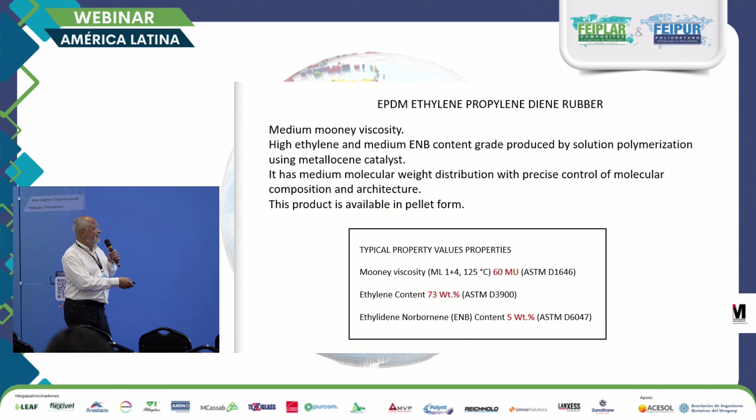First, I'm going to talk about what is a TPV. It's a thermoplastic vulcanizate in which we have a polymer matrix of PP, a PP matrix and crossed links of EPDM. So we have a rubber with a plastic. That's why the name is elastomeric thermoplastic.

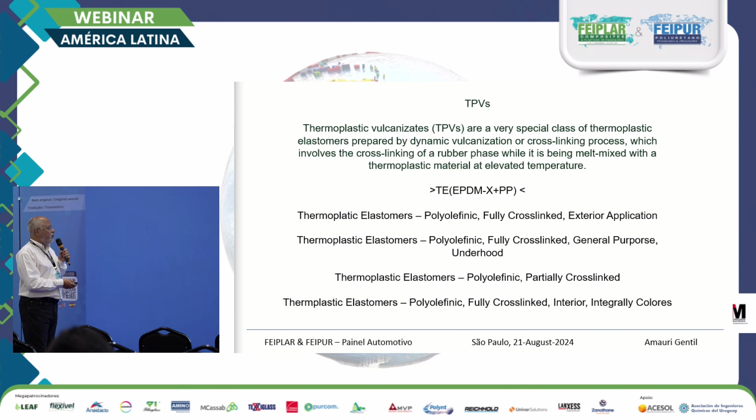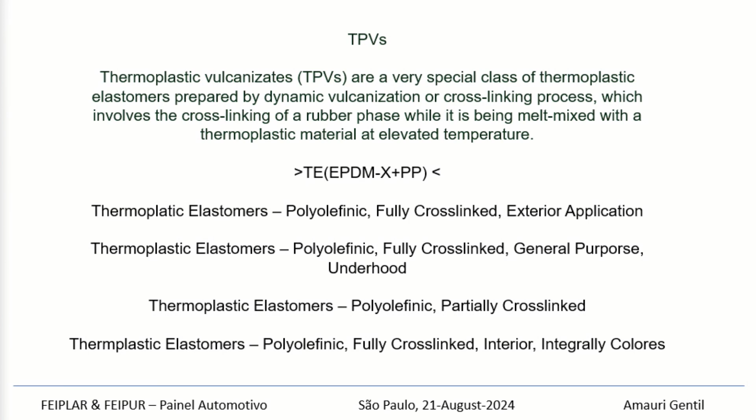I'm going to talk about a case that happens in the automotive industry. We call it glass run channel. It's this piece. If you don't know this part, it's where the glass runs in the doors. The glass of the windows runs inside this channel.

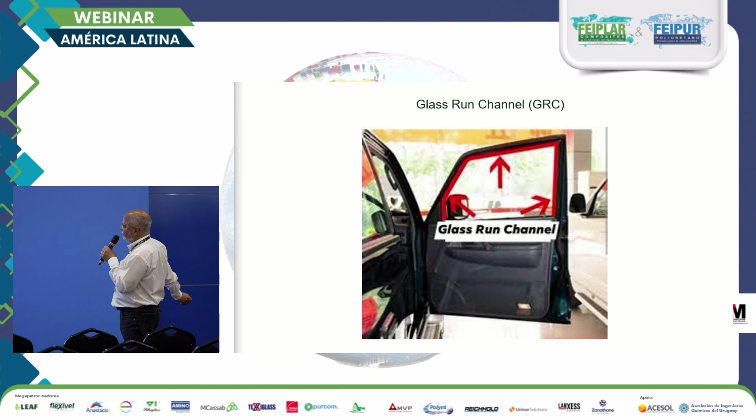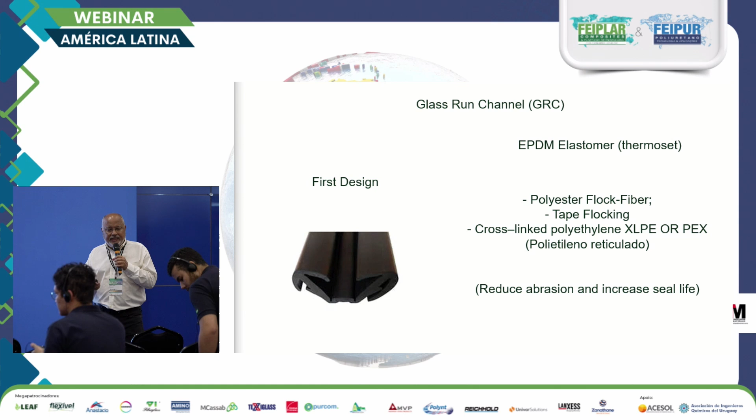How was it done in the past? This part in the past was made of rubber. Rubber is an EPDM. And where the glass ran, we needed a different type of material, of polyester, of flock fiber, because the characteristics of rubber is to grip. And if you place glass in a channel like this, it's not going to glide or slide.

That's why we did the EPDM rubber, and we applied a polyester flock fiber, or a tape flocking, or a cross-linked PE that had the reticulation process to run the glass.

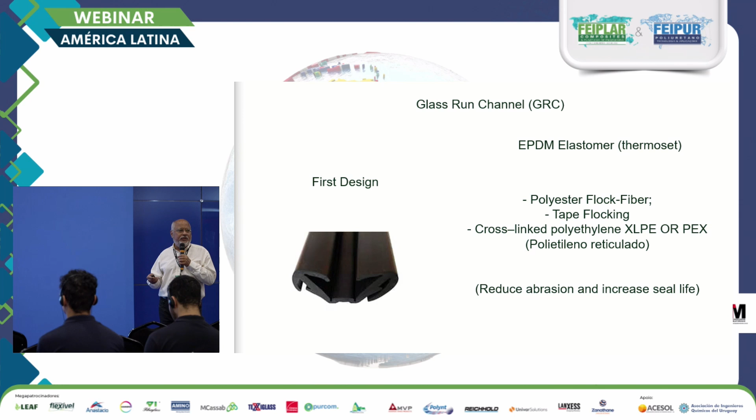This was all replaced by TPV. Why? One of the major reasons, which is a trend of all the thermoset materials, is to change to thermoplastic material, especially for recycling. And by recycling, I always like to stress that it's not at the end of the product's life. I talk about recycling during the production process.

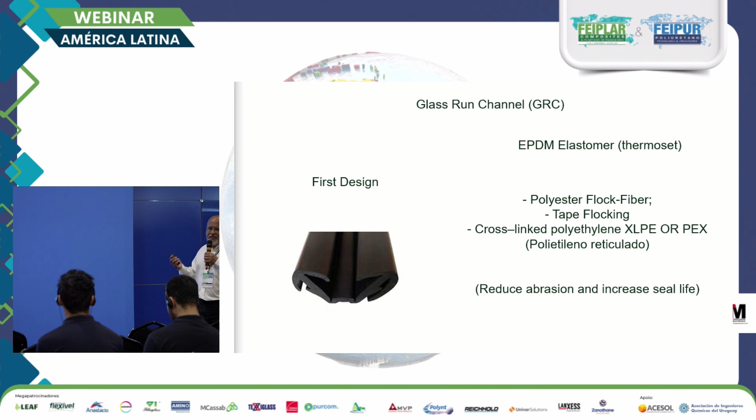So when we're producing a thermoset material, like an EPDM rubber, all the scrap wasn't reprocessed because it's thermoset. After it's vulcanized, you can't put it back in the extruder. With thermoplastic material, when I mention recycling and regrinding, I'm always talking about the process. Because after this goes to the landfill, after 30, 40 years, it's going to mix with PP, PET. It's not going to become a glass run channel anymore.

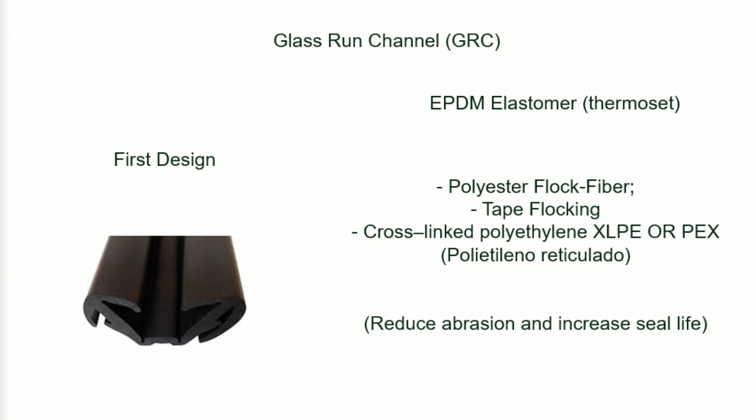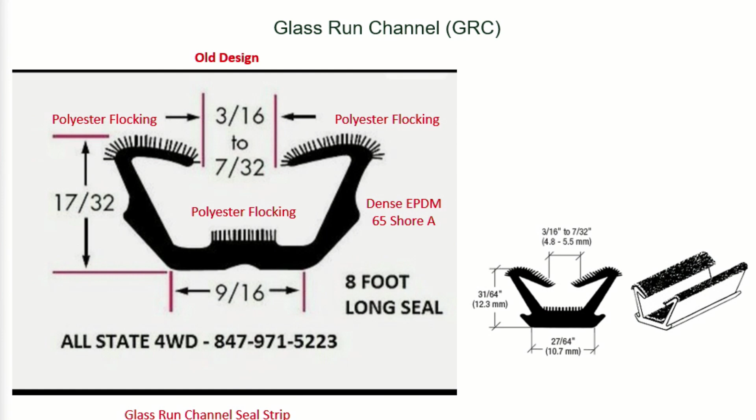During the production process, all the waste, the scrap, will be ground again and put back in the production process. How was this part in the past? These little wires here are the polyester flock fibers. It goes inside the metallic channel, and that's where the glass runs. So the entire surface that is in contact with the glass needs this flock fiber on the EPDM rubber.

And what did we do in the automotive industry? We changed our process. What was the main evolution? We used a TPV in which you have 3 grades of material. So you're going to work with 3 extruders and 1 single matrix. And why do we have to work with 3 extruders? Because we're going to have 3 different types of material.

The material is expanded TPV, like foamed TPV, in which you have a reduction of mass. The other part of the same part is a dense, rigid TPV. And where the glass will run, we're not going to use polyester flock fiber anymore. We're going to use a low friction TPV.

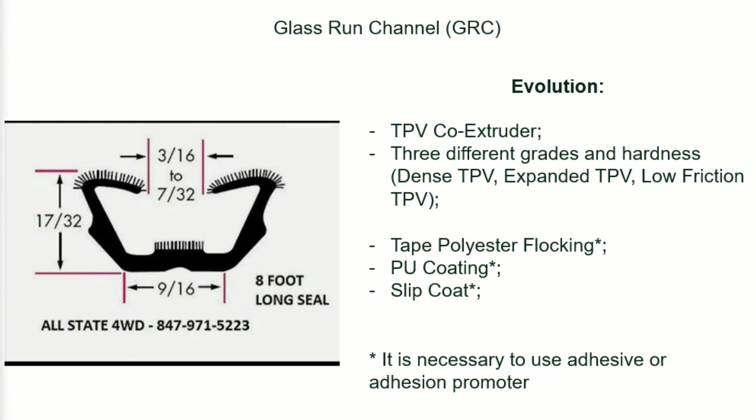And when we do all that, we will have 3 hardnesses, 3 different materials running in that channel, and the adherence between them will be the melting point of the materials. So it will heat and adhere to each other, and we will have a very strong anchorage. So you don't need adhesive or anything, so you save a lot in the production process.

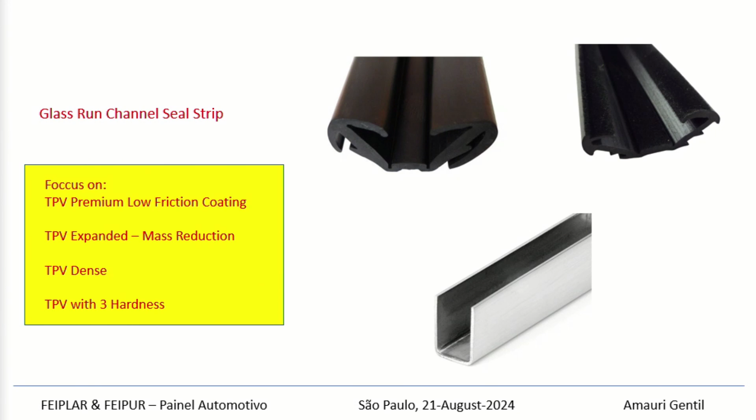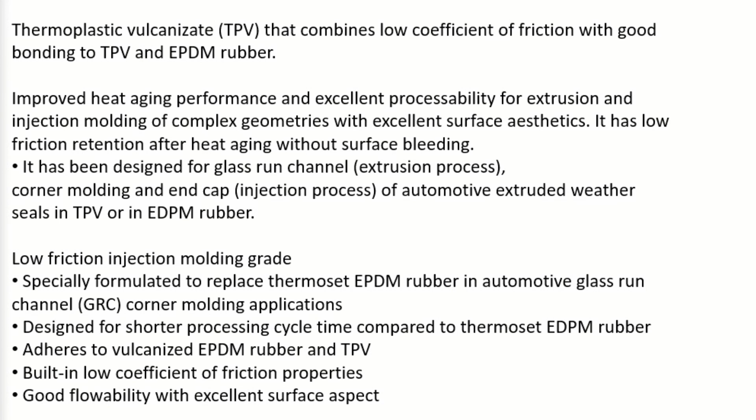I'm going to speak of some of the advantages of having a low friction TPV. It will offer excellent performance with very little waste. You will be able to do a better design that will fit the vehicle's door better. You won't have any gaps or deformed parts. Also, you will have much better durability than a thermoset rubber.

Additionally, in terms of sustainability, what are the advantages of using a TPV? TPV's density is lower than a thermoset part, so you will be able to reduce mass. Automotive companies want the car to weigh less and less, to reduce mass and consume less fuel. With the density of a TPV of 1 gram per cubic centimeter, or an EPDM of 1.15, it means 15% more mass on these parts. And they have a considerable volume in a car.

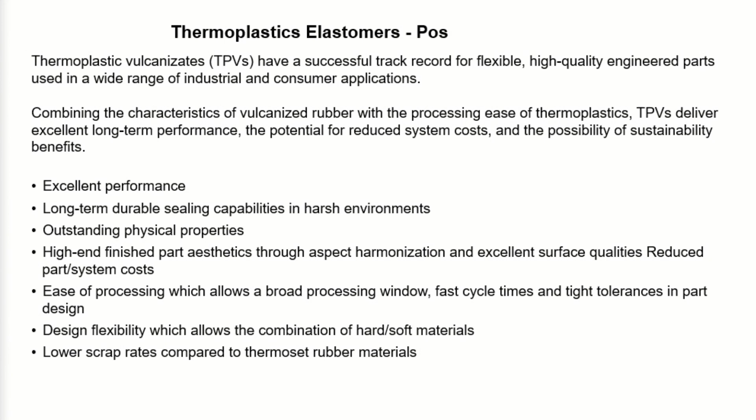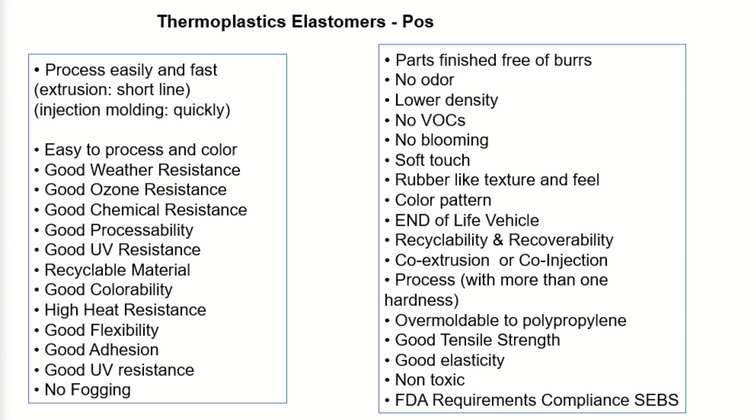Resistant to weather. We have instruments that simulate UV light, and the part holds its color. It doesn't fade or lose its color. It also has good chemical resistance, good processability, and good UV resistance.

The material is excellent for adherence. Also, in all the tests we conduct in vehicles, the part can't exude oil. Inside a vehicle, when the external temperature is 40 degrees for about 2 hours, some areas inside reach 105 degrees Celsius, and at those temperatures materials start releasing oil.

Things like carpets and plastics release oils that condense on the glass. That's what we call fogging, and it fogs the windows and glass, causing distortion of the image. There's also odor - if you get a mat like the one you put over the rug, the smell inside the car is terrible. TPV doesn't have any odor.

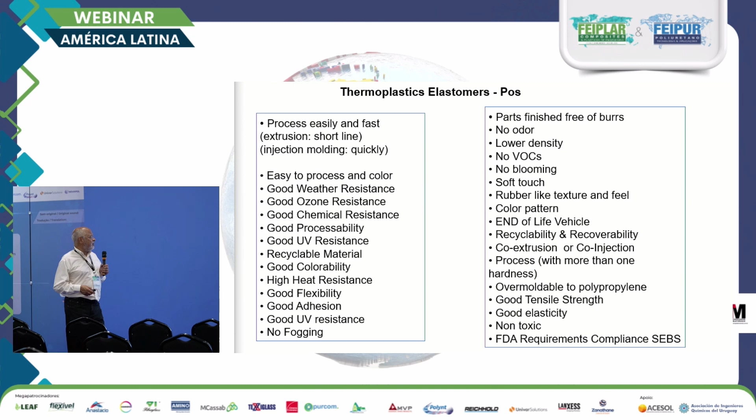We were able to achieve hardness from 20 Shore A to 40 Shore D, so it's a wide range for polymers. The temperature range goes from minus 40 to 130 degrees Celsius, so you can work inside the engine compartment, for example.

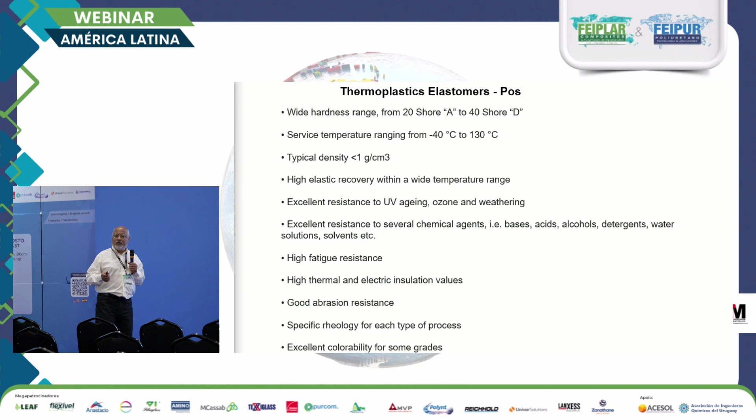Where the air filter and the hose are, you can use TPV material there. So temperature up to 130 degrees is our normal working range. It has excellent UV resistance, resistance to ozone, detergents, acids, fatigue, and good abrasion resistance, as well as good color standards.

There are some things against it. It's not a perfect material for everything. What is the greatest problem of TPV? Since it has plastic in the middle, it has the characteristics of plastic.

The compression set and permanent deformation are much worse than rubber. In some parts of the door, we have a sponge bulb with a metallic core, and we use EPDM there. We don't use thermoplastic, so for some applications it's not going to work.

Another application where it doesn't work - I won't make parts out of TPV because the deformation doesn't meet the requirements. When you apply a load, it will deform.

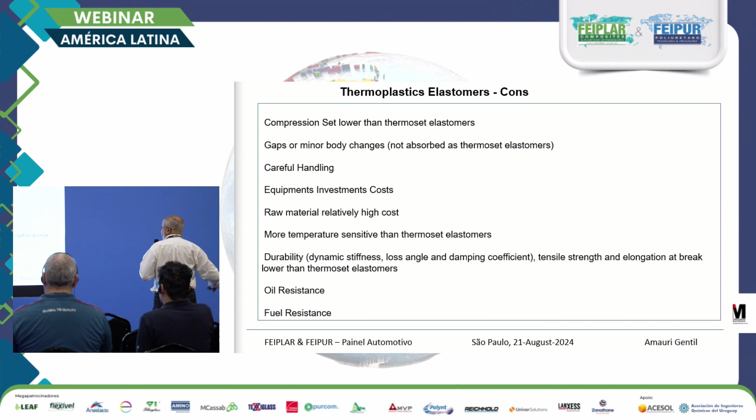You have to be careful when you handle it. It requires careful handling because it deforms if it hits any sharp edges during transport. So when you wrap it, it has to be wrapped in paperboard so it doesn't deform.

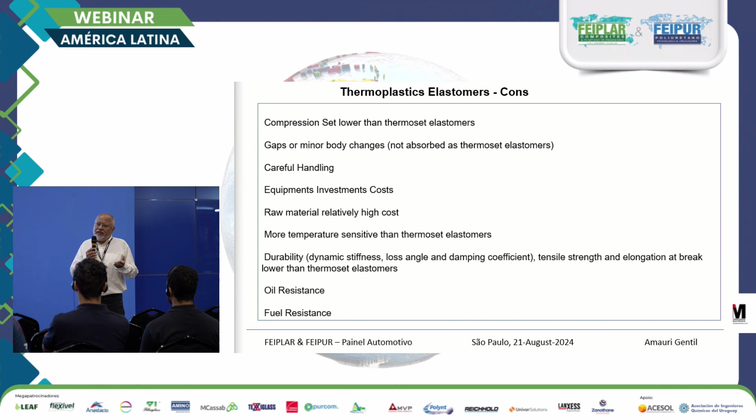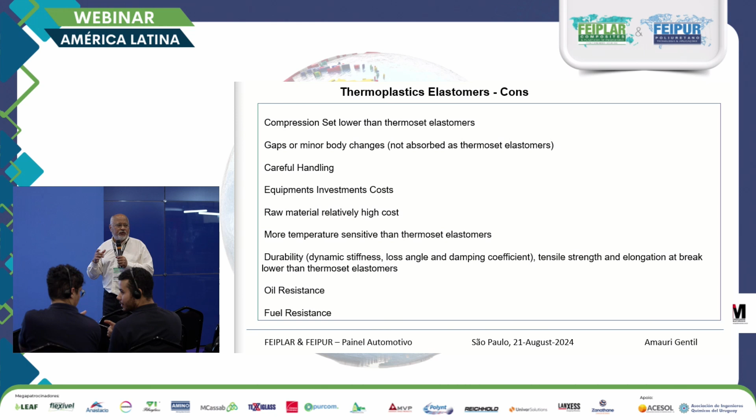So TPV is ideal for things like air vent tubes, glass, and body seals - it's excellent for that, and also for some boots from the half-shaft.

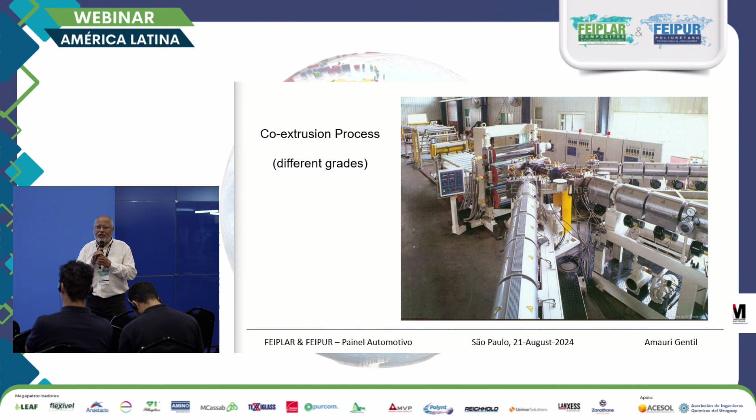This is what I was saying - when we work with the glass run channel, where we have glass materials and expanded TPV, dense TPV, or low friction TPV, we have two entries that go to one single matrix. It has adhesion to the material, and when it cools down, it's already anchored without the use of any adhesive.

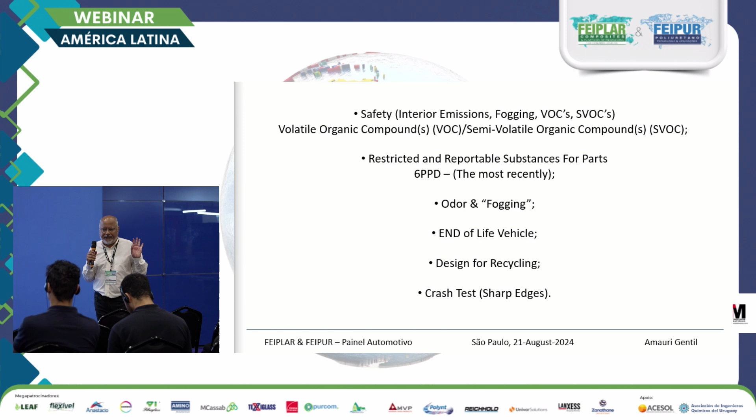We also have legal requirements. When we say that, it applies to any part of the vehicle, so none of the vehicle parts, even the EPDMs, can have odors or fogging.

At the end of the vehicle's life, it has to be disassembled, so you have to design it in a way that makes it easy to disassemble the parts. Imagine a part that has metal together with plastic - you need to have a design where, when it's protected, it's easier to disassemble.

And crash tests - what I always point out, for example, are the panels on the side doors where you raise the windows. If it's pure PP, in the lateral crash test, it breaks.

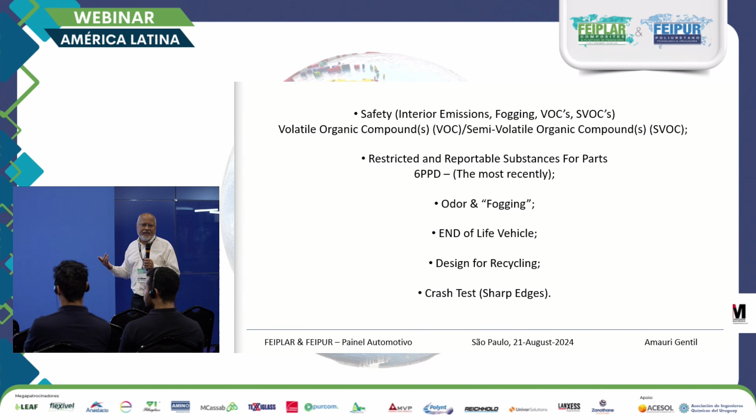When it breaks, it can form sharp edges, and it could punch a hole in the dummy - that can happen. So you need to use a more flexible material that can be elastomeric. Normally we use EPDM, so when the door panel breaks during a crash test, it's not going to create sharp edges. These are automotive regulations.